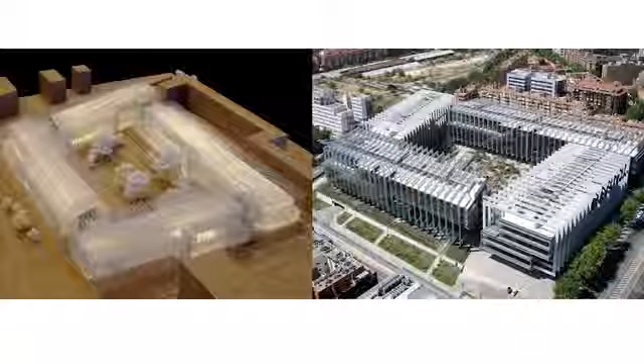Here the challenge was to follow the layout of the city, to follow the block pattern of existing Madrid, in a way to recover an idea that previously didn't exist - because the area around the railway station had been demolished, almost all the old warehouses and industrial buildings around it, and the city joined this area at this particular moment. So the challenge was, following the tracks of the railway, to follow the discipline of the city, using the block as typology, keeping the same height as the surroundings, and creating a central courtyard around which we arranged the new buildings.

The building followed the idea that if it was to be under the discipline of the city, the building had to be the same. So what we did was rise up the block.

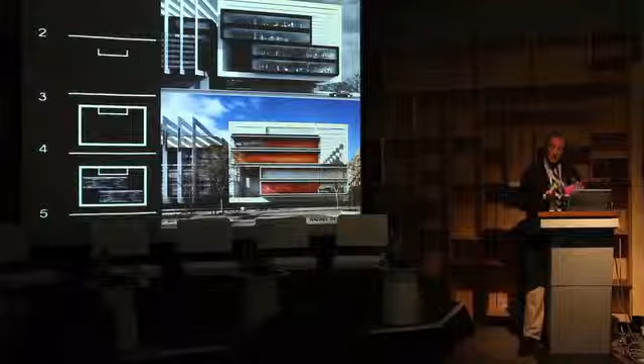We rise up the boundaries of the land to put it up at the square. First is the land, second is just two columns, third is a beam, and the fourth is the land hung on this big beam, and in this frame we switch on the building, the offices.

So the building follows the site. The building is a repetition of this cross section all the time, many times on one side and many times on the other, and the third and the fourth. That's all, very simple.

Those frames are the structure, and at the same time they serve as sun devices and protection, which allowed us to offer the client a totally freestanding floor plan with no columns, because all the structure is outside and protects the building from the Madrid sun, which is quite strong.

We worked on this central space with Tilman Latz, a German landscape architect, in a very interesting collaboration preserving the nature and landscape of Madrid, with pines and all these local green plants and trees.

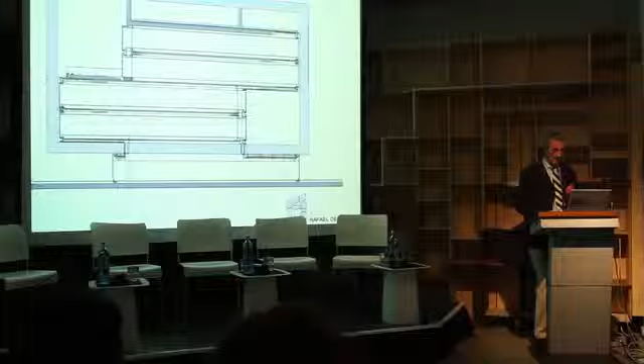The four buildings are connected by very transparent and light bridges that you can see in the plan, and all the vertical cores are outside of the plan to keep this completely free. Once again, the section is, I think, the more relevant part of this project, with this idea of following the track, following the city, raising up the square, and switching on the offices.

The second one is not far away from Repsol. Repsol headquarters is in this picture on the left side of the railway station tracks, and the La-Hoz and Velarde Cultural Center is on the right side.

It's different because we were lucky enough to preserve one of those warehouses or industrial buildings that exist along the tracks of the railway. It was in a very poor situation, damaged, with all carpentry and glass disappeared. The roof and all the cladding of that industrial shaped roof had been destroyed - here's some pictures of the interior.

So the urban planning office of Madrid, the city hall, asked us what use could be suited for this building, to renovate it for what purpose.

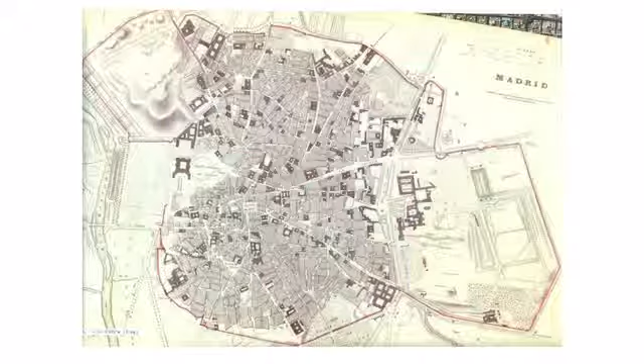Not existing at all today, the Palacio del Buen Retiro. In a way, it was the weekend palace. So the kings moved from the palace itself to the weekends with the park behind the palace, and Madrid in between. The old city and the walls. This is Madrid. The rest is extension and extensions.

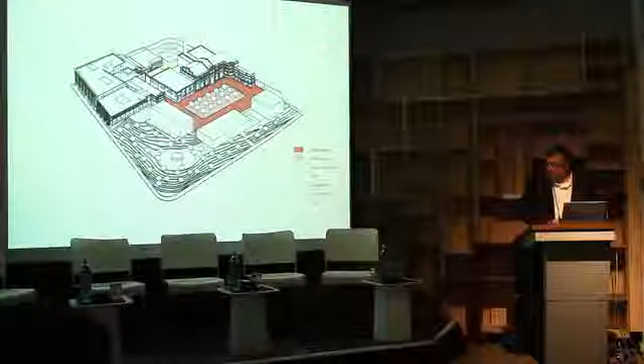This is one of our latest projects, which we just started to think about. It's quite funny, it's an old brewery, like this one here, which we are working on - the Bötzow Brewery. We started on that project a few months ago, and it's not finished, even the planning is not finished. So we are in the process of looking at the fragments we find, collecting them and looking carefully at them, trying to understand the bigger idea of the project itself and clearly the approach to the city.

The Bötzow Brewery had a quite interesting concept because they produced beer but sold it on site. So originally there was a very big beer garden, which allowed the city to enter the project. We are very happy that the client is interested in doing the same again. So talking about urban space concepts, even how a project is connected to the city can be part of an urban space idea, and I think it's very nice that we can bring back this idea to the city again.

But back to the vase - this could be a solution, but we're still looking at it, and we're trying to explore what is the right answer to this, and how the vase looks in that particular part of the city. Thank you very much.

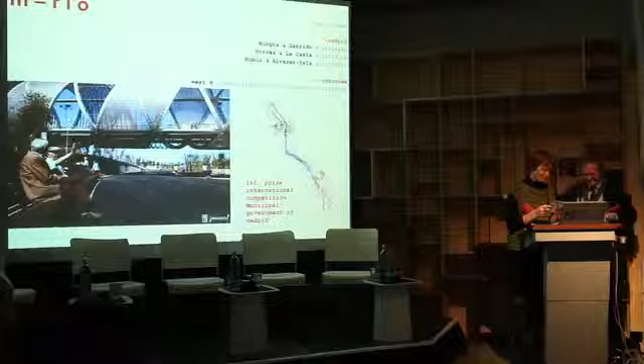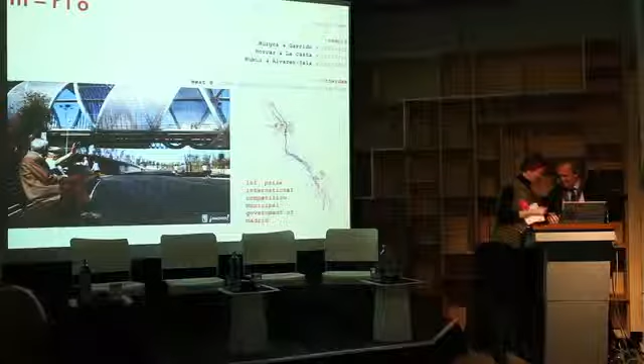Well, thank you very much. It's a pleasure for me to be here. My lecture is going to be about the transformation of the river, of Madrid.

If one speaks about free spaces, gardens, parks, trees in Berlin, it is probably not a very exciting lecture. But if you see it from our point of view, then it is completely different—it's another story. First, I wanted to show some pictures of Berlin and some pictures of Madrid, so that you can have an idea what Madrid is.

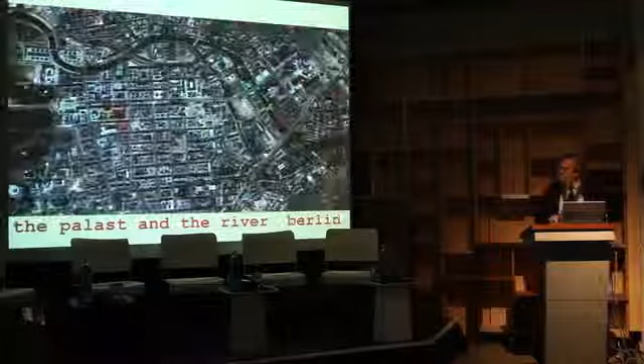The density of both cities is completely different. I've taken pictures of the same scale and from the same zones of the city. You can see here the palace from Madrid and the river from Madrid—this is the river, the Manzanares, and this is the palace. This is the same scale from Berlin. As you can see, even the color is completely different.

In Berlin, the problem is to build things in these voids—they are all over the city. In Madrid, it is completely different. You have a very dense city with many buildings, an old city with much sun. You can find trees only in the streets because there's no place for anything more. So there's a necessity to make some free spaces and put planting trees everywhere. This is the 19th century city from Madrid, the upper side, and you can see Mitte here, unten.

If we speak about the river in Berlin, it's a big one with even ships inside. If you speak about the river from Madrid, as it was before this transformation, it was really a highway. In summer, the river almost doesn't have water at all. It was really a highway, and the big green spaces that are in Madrid were all isolated by this highway—it was almost impossible to go inside.

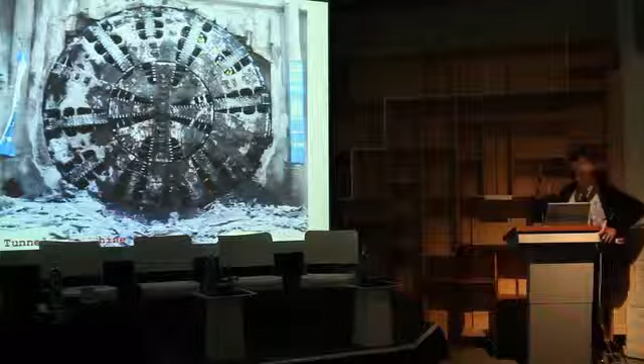One first transformation of this river was purifying the water, and this was made in 1984. But in the first years of this century, the idea of the city hall was much more ambitious. They wanted to bury the traffic and gain upper space to make something, though they didn't know at that moment what they could build there. For 4 years they worked underground, making the tunnels so they could put the highway below and gain a void to make a park or something like this.

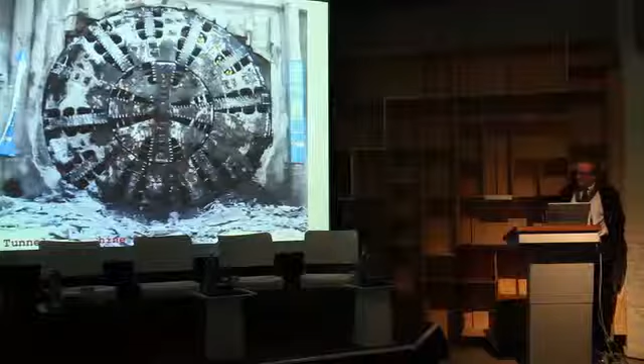It was made into an international competition, to decide what we could make with the city. It was in some way open-heart surgery that was made there. It was very hard, but after 4 years we had 7 kilometers of underground traffic and a big void where we could make something special. Sometimes it is more important to think about what we've done before, because we can make something very nice on the upper side, but the most important things were made before. The works to bury the highway were terrible, and the investment was also very big.

To have an idea of the dimension of this project, it's like taking from Alexanderplatz to the Kurfürstendamm here—also 7 kilometers. Well, and then the problem was: what should be made with this country?

What was our idea with the project? We started to think of the river from a geographic point of view, not just as an accident in the city. We thought more that the city was an accident in the river. So the transformation should be not only about what we can make in the city, but more about what we can make with the river—understanding it as a river that comes from the snow on the upper side until a much warmer landscape.

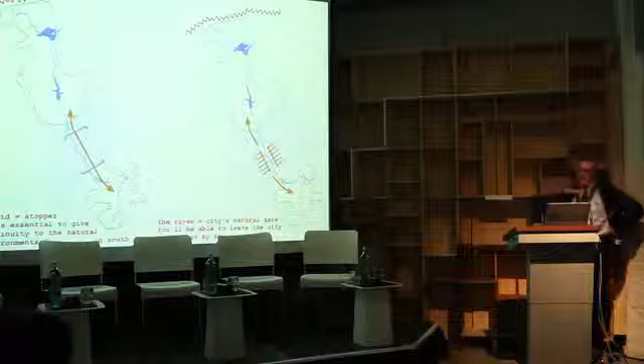So between these two landscapes, we should put inside the city of Madrid as much landscape as possible. And this was the idea of the project. We wanted to give the possibility to go to nature through the river, and to make the river a gate to nature from Madrid. For many years the river had gone through Madrid almost hidden, without the possibility to go from one part of the city to another—it was as if no one knew where to put a highway or where to put the river.

So this idea was to sue the big green areas in the city. Perhaps you have the feeling that in Madrid we don't have green areas, but we have very big ones. The only problem was they were all isolated, and this new operation of the river gave the possibility to connect all of them.

Casa de Campo is the hunting property of the royal family. On the north, Monte del Pardo, and on the south, La Vega, the river, Manzanares. This is the Monte del Pardo, you can see here the Mediterranean wood. This is Casa de Campo, a very big one in the city, in the center of the city, but very isolated. And this is the south of Madrid.

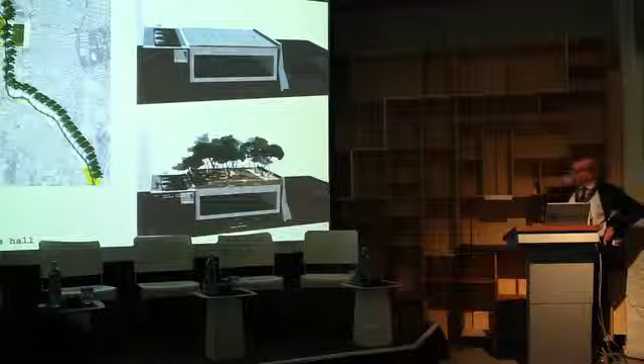So you can put wood all in front of the houses, and we selected this kind of trees, which were more sculptural, more expressive. And big ones, naturally, because we don't have much time. We wanted to have this wood as soon as possible, so that we could hide the buildings.

And this is the aspect now of the river, with many spaces for kids. I must say there are more than 200,000 people on each Sunday on this place. Well, we are going to make now a quick trip through all the river as it is now.

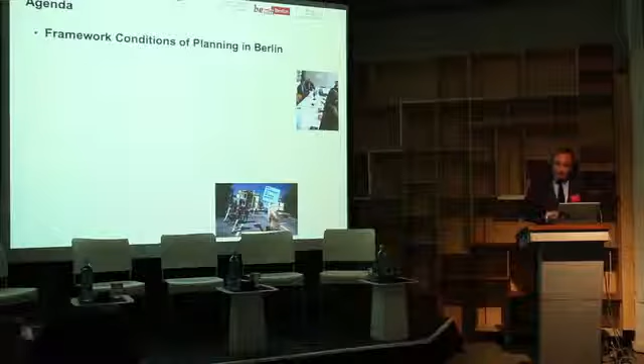So, a green hell, Berlin, as we heard it, completely different from Madrid. And what I'm going to talk about is the framework conditions of planning in Berlin, and what is important to transform the city, what role does heritage and the existing city play for the development of the city.

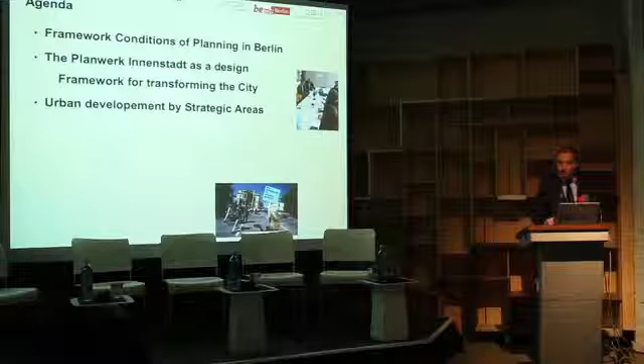Second thing is the so-called Planwerk Innenstadt, which was something like an urban design framework for years in Berlin. Then the urban development strategy working with strategic areas, as we heard it just from Madrid, this green development concept with about 4 billion euros invested. And then the priority of Baukultur, the foundation of Baukultur, which I now work in, leading to a city development concept 2030 in Berlin, and something like a conclusion.

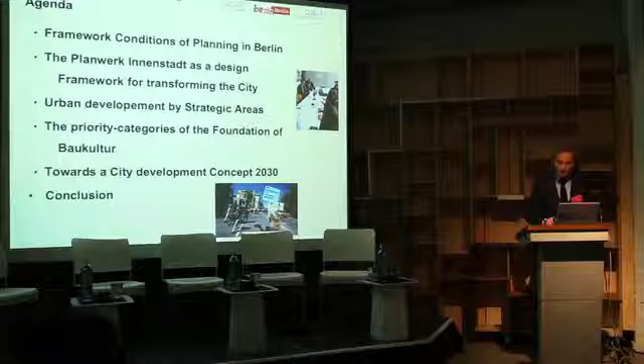To focus on Berlin: Berlin lies in the middle of Europe, like Madrid lies in the middle of Europe. But the importance of this geostrategic situation becomes more and more important because we are, to be honest, still at the edge of old West Europe, at the edge of East Europe, and we are combining North and South. That is important for developing the city.

That's something like the framework, the identity we work on. For years, we've worked on a geostrategic suggestion that perhaps Berlin, combining North and South, can be as successful as the West European countries have been with the Blue Banana.

To focus on Berlin: Berlin is situated in the northeast of Germany, and it's a bit of a monocentral place in the city and in the country, like Madrid is. So each importance, each central offer, is concentrated in the city of Berlin, organizing with axes into the surrounding area of Brandenburg and the neighborhoods.

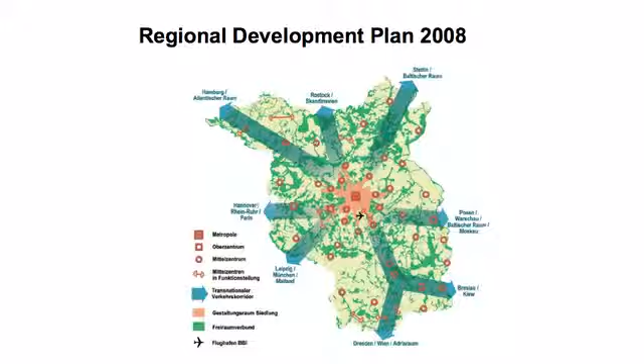We are reachable to only 6 million inhabitants in the region of Berlin and Brandenburg. So this star concept on the axes of infrastructure, streets, settlement areas, railways, is important to understand the city.

The city itself has about 3.5 million inhabitants. We have about 900 square kilometers in size, 40 by 40 kilometers, and we have a two-folded system: a city development department, and 12 boroughs which are in charge of building permissions, legal planning law, and also the first step of heritage concepts in the city.

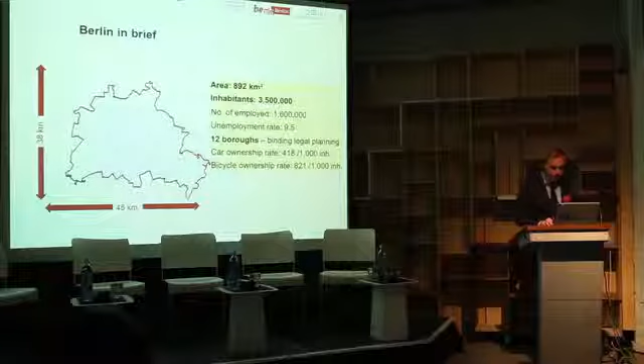Berlin is a growing city, like probably Madrid is growing. We have high fluctuation in the city — a big number of new inhabitants come to Berlin, another big number leave. So the 'real Berliner' has become very rare.

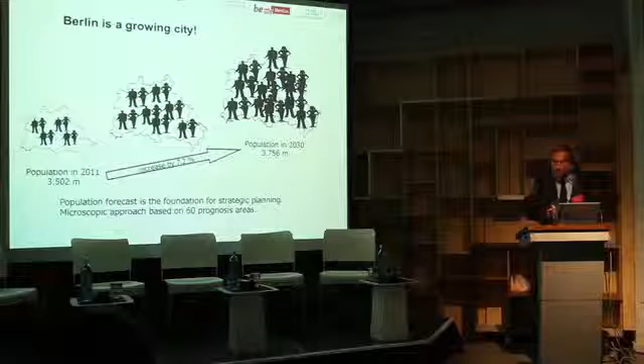We are a city of high fluctuation, and we are a growing city, from about 3.5 million inhabitants up to 3.8 million inhabitants by 2030. That means we have a need for space — residential, office, and so on — in the future.

Although we have a lot of voids, a lot of empty places in the city, we are looking for opportunities. That is very dramatic in the issue of residential space — looking for places for residential use is important because the quality combined with this is often demanded.

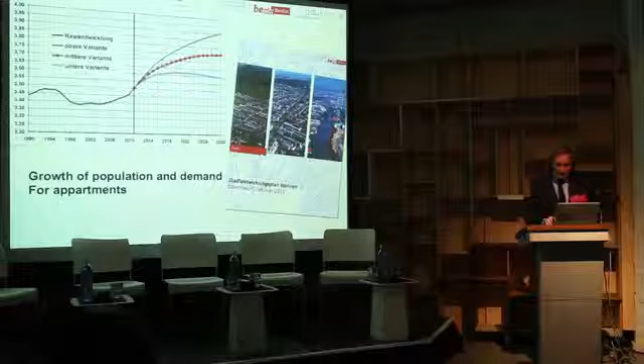On the other hand, Germany, and I think also Spain and other European countries, are shrinking up to 2100. That means the landscape has become more and more empty, and we have to look for strategies to combine these shrinking and growing regions in a real strategy.

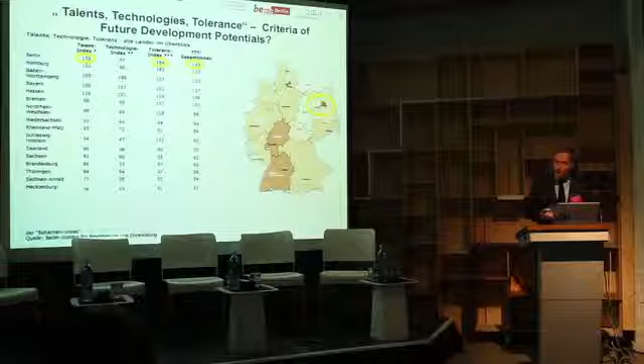To say it in one word, Berlin is something like a city of science, knowledge, and wisdom — not a merchant city, not a bank city, not a trade city. So we have to do something with these competences, being a city with a lot of fluctuation, a tolerant city, also a city with knowledge in it, but doing little out of it.

Looking for real jobs is still one of the biggest challenges in Berlin, because Berlin, unlike Madrid, is poorer as a city than its nation. That's completely different from other cities — all the big cities have a bigger gross domestic product than the country. It's different in Berlin.

That's one of the reasons you have to keep in mind, because development comes out of this structural change from an industrial city — with all the emptied industrial areas we heard about, like Bötzow-Brauerei — to a service city, to a city of new creative jobs. To start with the spatial conditions: with reunification about 23 years ago came the big challenge of bringing both planning systems together.

The West Berlin planning system, the land use plan, and the East Berlin system had to come together. You can see quite easily that the West Berlin part is a grid of development, while the East Berlin part is still a concept that runs with radial streets towards the old castle, towards the Alexander Tower. That is very important to understand the city.

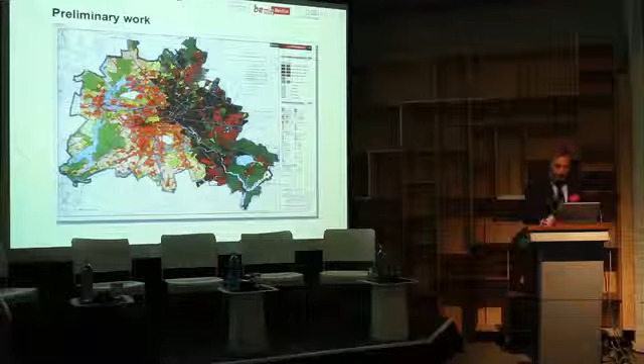The preliminary work was done by looking at the fabric of the city, which has high density. It's included within the S-Bahn ring — what we call the S-Bahn ring — and along the axes of settlement areas.

After years, we were able to create a new land use plan for the city, including a polycentric system with two main centers, east and west, and 12 borough centers surrounding them.

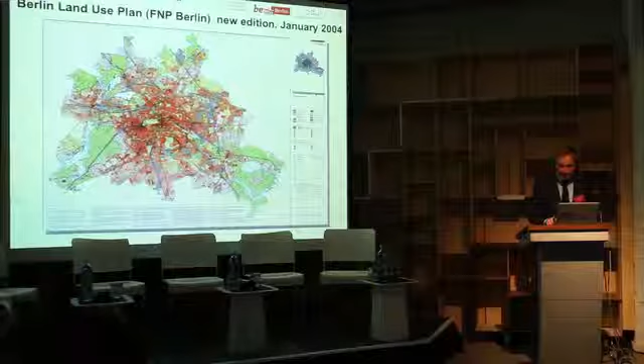So from the beginning, we wanted to hide away the suburbanism concepts that were done in other big cities, which were hidden away in Berlin because of its isolation. We announced going back to the inner city to develop the things already given there.

The strategic element, something like an urban design framework, was the so-called Planwerk Innenstadt. We heard it from Harald Müller - a design concept that says we want to fulfill, repair, and reconstruct our old European city, because the infrastructure - the streets, canals, piles, subway stations - everything is still there. Restoring this and bringing back the old density to the city was one of the biggest issues.

The reason for that is the city had a high density before World War II - we could perhaps compare Berlin even with the density of Madrid - but it was demolished in World War II, more than 50% in the inner city.

Then between 1953 and 1989, the city was not demolished again, but transformed by us, by planners, looking after new opportunities for new concepts of settlement areas, new traffic or infrastructure access, and so the density again was decreasing.

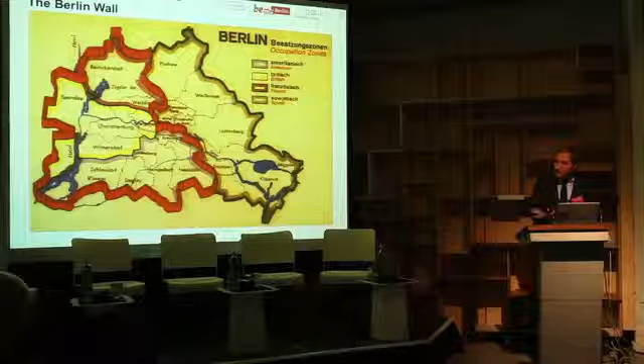In that time, some new things were under construction, like the socialist modernism of Hansaviertel, the same thing in West and East Berlin. The whole time, this special aspect of being inside borders in West Berlin, but also inside borders in East Berlin - a political border - is very important, because this ribbon, this wall inside the inner city, was not only a wall, it was a system of space: a front wall, a back wall, the space in between - that was something like a structural element.

Today our power and our strategies go in the direction of saving or bringing back this structure as a monument, as a heritage project, but also as an element of open space development in the inner city.

Then, step by step, the city was fulfilled with new buildings in Berlin. You see the East Berlin part, Friedrichstadt, was fulfilled in the strategy of the European city, even from the GDR.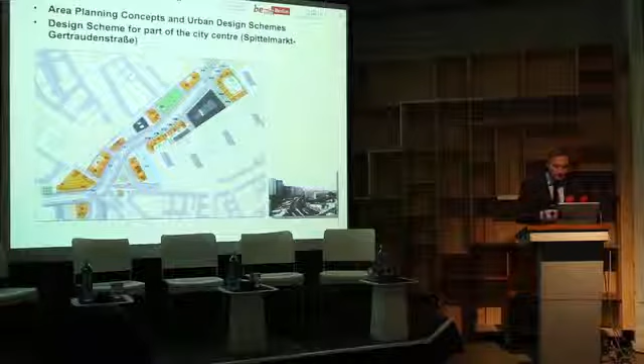Step by step, those opportunities of fulfilling the inner city, of regaining the fabric, were done in very complicated manners, because you have to pre-invest in the infrastructure, find a solution, then develop areas like this, and then you can sell the ground and try to make something out of it.

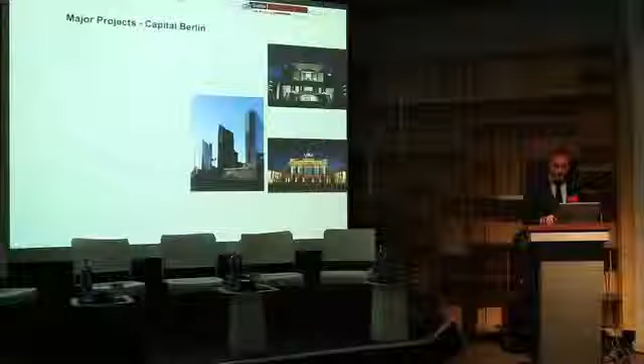This process is still running. For example, Molkenmarkt, just in the city center, is being transformed or could be transformed into an inner city situation, but it costs a lot of energy, a lot of money, and so this project will run for the next 20 years.

The last step, if you want to put it like this, the closing stone for everything is probably the castle, which is under construction. You see the competition for the castle, more than 1,000 works submitted, but the result is the castle as a castle - these are images from the new building, which will be constructed as a Humboldt Forum just in the middle of Berlin.

So what we gained with this Planwerk Innenstadt is not only a restored old city that was announced as a critical reconstruction - and the result we probably get is a reconstruction, not as critical, not as creative as we hoped - but we got a lot of open spaces, as a colleague from Spain announced, promenades, walk sides at the river, and a lot of urban design ensembles. Not the single building was important, not an icon building like Guggenheim, but an urban design ensemble like Pariser Platz, Potsdamer Platz, Friedrichstraße, and so on.

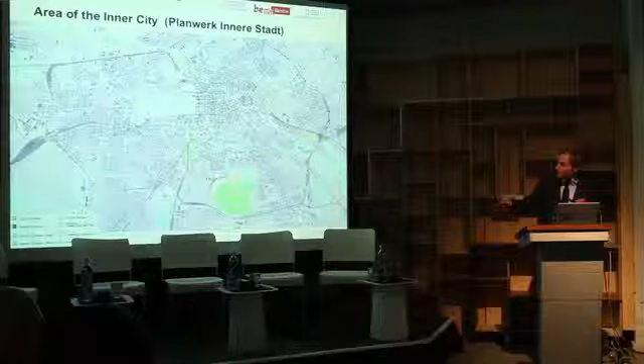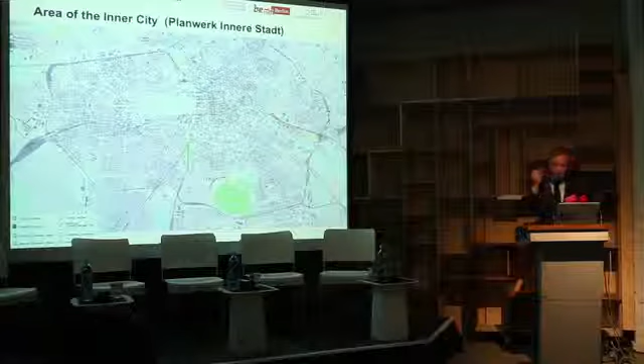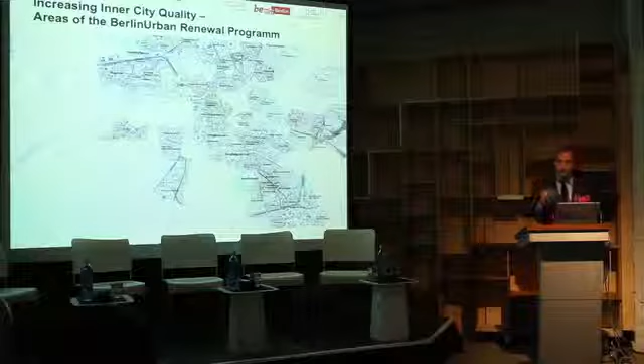Inside this fabric of the Planwerk Innenstadt, we have this legal corridor of investing in the existing situation, the urban renewal program by law, by tax, and so on, which were given to the city to restore the existing situation a bit like it was.

Berlin, as you know, is a UNESCO World Heritage City, and we do have projects now with the settlement areas of the 20s. Professor Haspel probably will announce this. Berlin got an international place by being

a capital, with more than 144 embassies, like Spain, for sure. And out of this internationality, a lot of tourists come to Berlin. Berlin, for years, has been in place 3 in the world, after London and Paris.

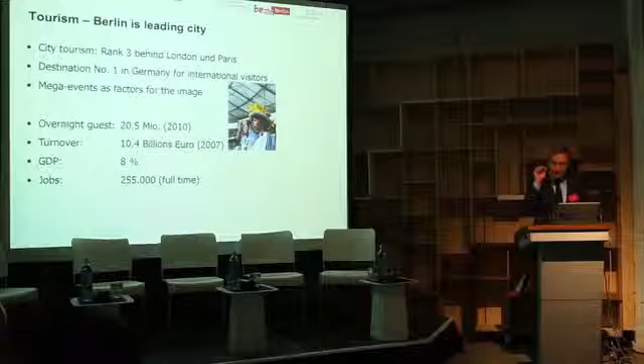And out of this touristicization, some problems also come for the heritage buildings. The Neues Museum, for example, at Museum Island, is under the influence of about 3.5 million tourists a year. The Louvre in Paris has about 12 million tourists a year, and Berlin has an opportunity of giving

offers for 100 million tourists or guests a year. So if all those guests want to go to Museum Island, then we probably very quickly have big problems. So our strategy as planners is also to stretch this touristification process for the whole city and find other opportunities

to guide away those big influences from the old traditional islands. The strategic areas concept was lost, so I go to the east-west corridor, the axes. That is a measure where we try to work on an urban design level for new strategies for the city.

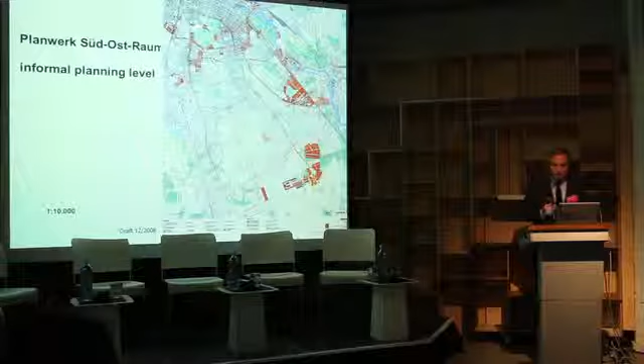The southeast corridor, which runs from the city to the new airport, offers a new opportunity to this corridor—for example, Schöneweide, which has been an industrial complex with old buildings included.

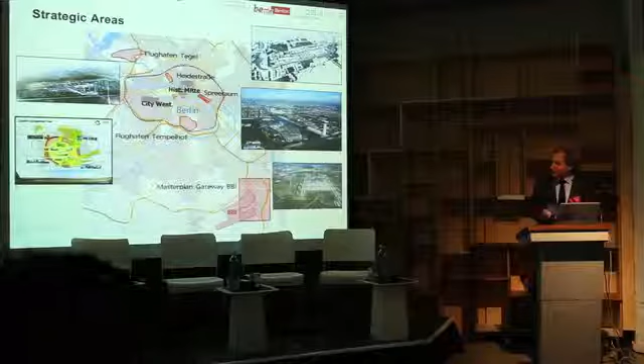Out of this strategy, we first worked with the Planwerk Innenstadt, then worked with the whole inner city. Now we try to concentrate our strengths on strategic areas. That is done because our money and also our power are not able to do everything at each time.

So the strategic projects were coming out of infrastructure, whereas things under development are, for example, transformation of airport land or of water bodies. Let me quickly run through these strategic areas.

These are places like, for example, the surrounding area of the main station, the new main station, which is a railway cross in Berlin. It combines not only the city on a central place where more than 300,000 passengers a day pass through, but it's also a central place in Germany and in Europe for the railway.

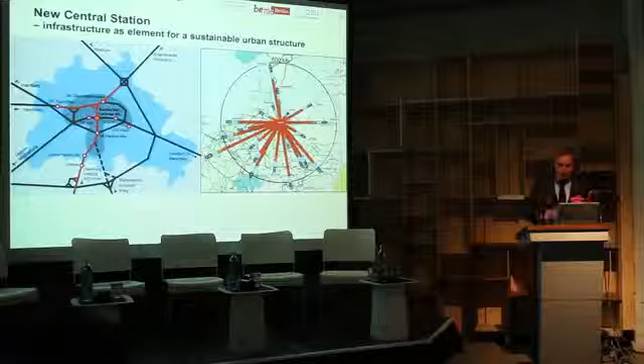And to the north of this area, we have an existing 40-hectare plot of land. There are protected buildings included. And this 40 hectares can be transformed.

We did a master plan for this, a master plan which shows quarters orientated around the existing buildings, all of which are included in the process. They act as something like an impulse for the atmosphere of these quarters.

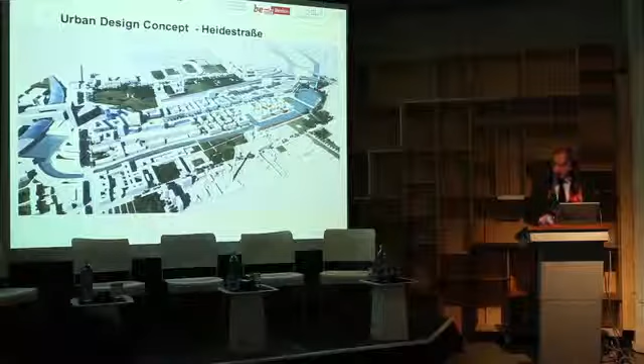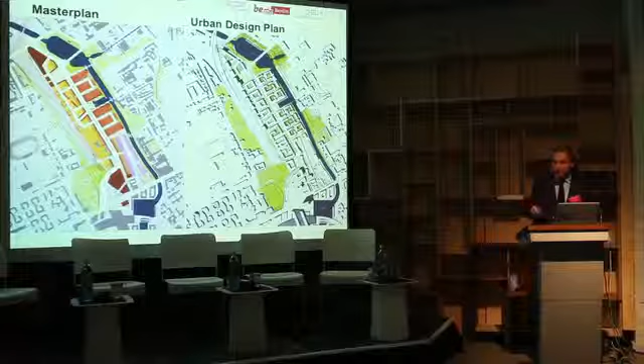And the concepts are done like this: the urban design concept is transformed into a strategic master plan, which is able to be developed with high flexibility in the process.

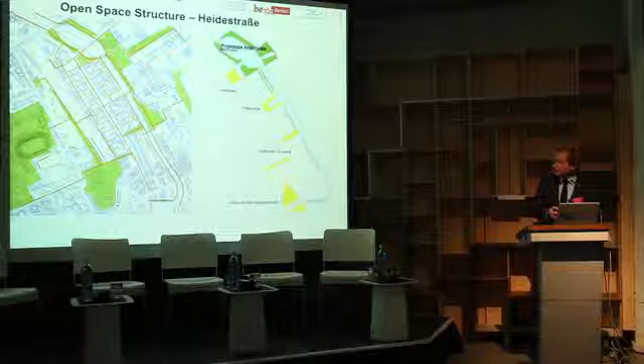However, the open space, the network of ways, the connectivity, and the cohesion of the spatial conditions are the motor of development, and therefore we every time do some open space competition to make the open space something like a framework for the single buildings which are included.

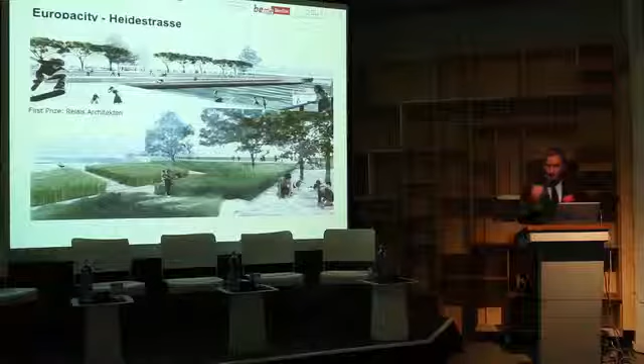And green space in a city, as in Madrid, is more and more important for the city. At the end it will look like this.

Or the Spree area, the water body of Berlin, which has a high dimension in the east sector. There's no master plan given there.

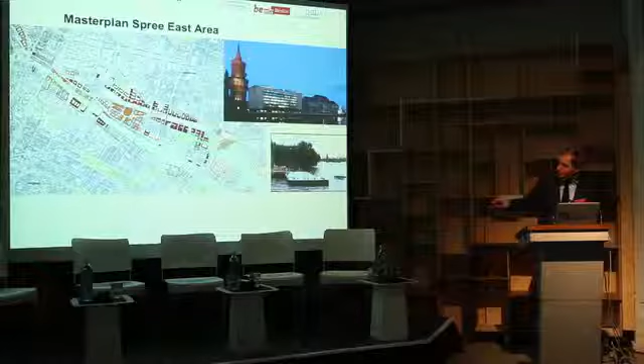It's only part by part development done by investors or done by the districts. Nothing really works together as a master plan.

And the strategy was to implement intermediate functions as pioneers for a new frequency of usages in this former borderland—that is the East Side Gallery.

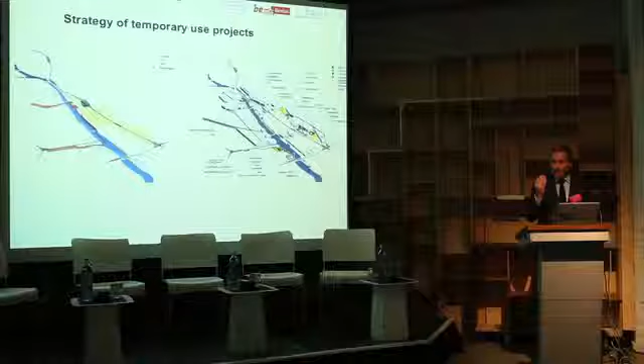What was done out of a protest of people—because this project wasn't really well communicated, it was communicated as a media city project—was to make a thing that investors often do. They announce their new world with transparency volumes, and those transparency volumes can later be made dark.

So if you paint a transparency volume dark red and so on, that's a big danger, and that danger led to protests. The inhabitants in this region were against the development of new dense buildings at the water; they wanted more quality at the water with promenades, a lower density, and so on.

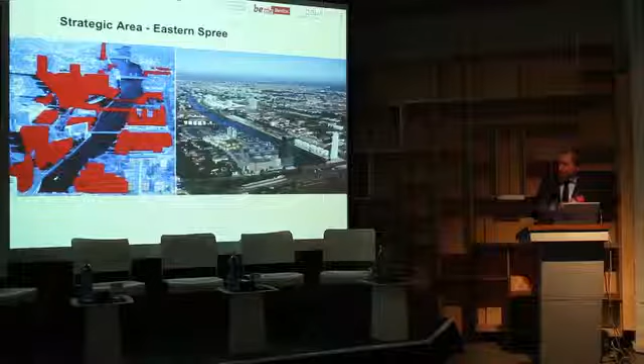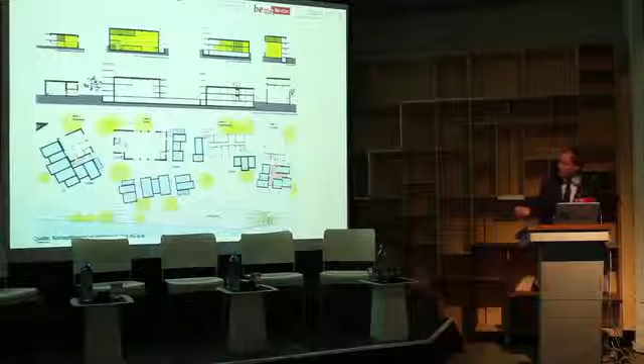Things changed, and what is done now is new development done by professionals together with inhabitants, which is very important, together with users who are able to perhaps only afford 25 square meters and use something good to be implemented in the projects. This concept for the place at the water body is something like a village which offers connectivity and open views to the water, with halls and small houses at the halls, and will look very strange compared with the old Berlin buildings, a new dimension.

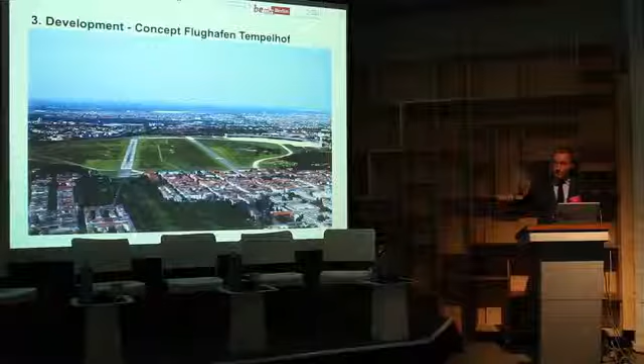We will see how architectural discussion will come under the influence of these new and modern projects. As for our old airports, once the new airport opens in the southeast, we have to close Tegel, and we already closed Tempelhof. What is very important with Tempelhof is this big building, which is the third biggest building in the world after the Pentagon and after the Ceausescu Palace.

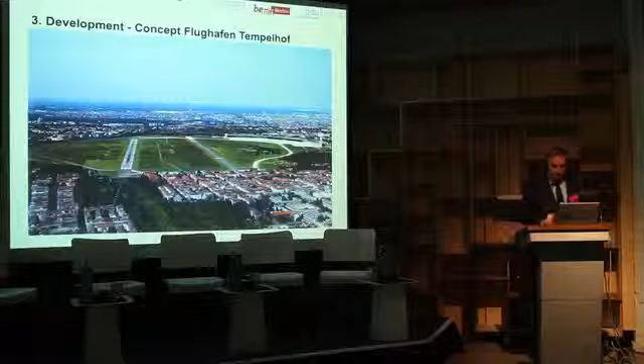It has about 300,000 square meters, 1.2 kilometers in length, and it's very big. The question is how to transform this area. The idea was to make a big park out of it.

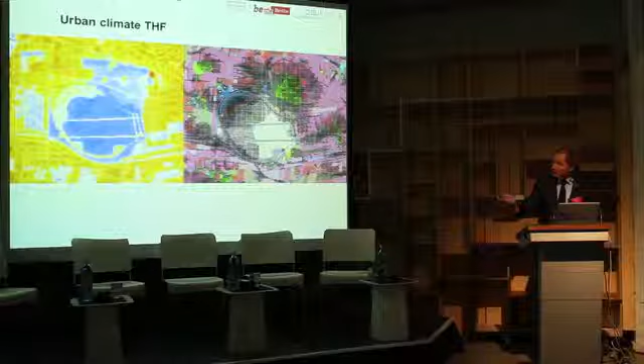The reason for this big park is the climate situation, cooling down neighborhoods by cold air at night, ventilation, and by opening it, the people in the surrounding area very much like this open space as an offer, as an opportunity of having nature, having a landscape part inside the inner city. It has become something like an image for Berlin.

So it's Berlin style, and the strategy for developing this area through intermediate function is very much focused on this Berlin style. On the other hand, it's important to find solutions for this big existing building, which is under development and has to stay as it is, while looking for new creative functions, which is very, very difficult.

A public-owned company is in charge of developing it. Not only the building is important, but also the open space, which we're running through a competition done by Grossmax, landscape architects, and the development of neighborhood areas in the surrounding, offering residential space, which is very important, and a new library. Or Tegel Airport, which is still open and will be closed in the next 2 years, hopefully.

There another big transformational area is given, and also the idea of what to do with the existing terminal buildings, only 40 years old, but something important for the future. Our strategy was to develop this area step by step with public participation. The first step was to bring a vision idea for the whole thing.

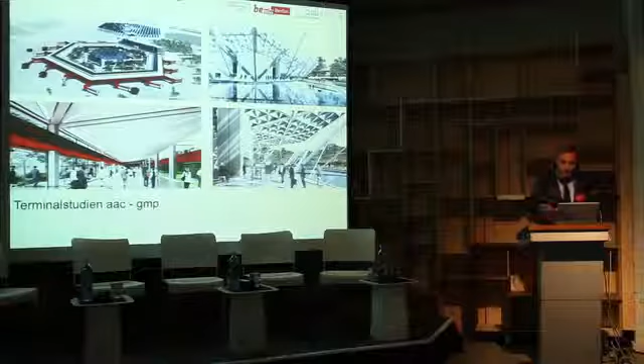This process was announced to the public, and brought the result of a working area and a technology city, a science city. By GMP, the architects of the terminal, the answer was given for what is able to be transformed in this existing terminal. They announced something like a lecture space and a university which we can implement in this area.

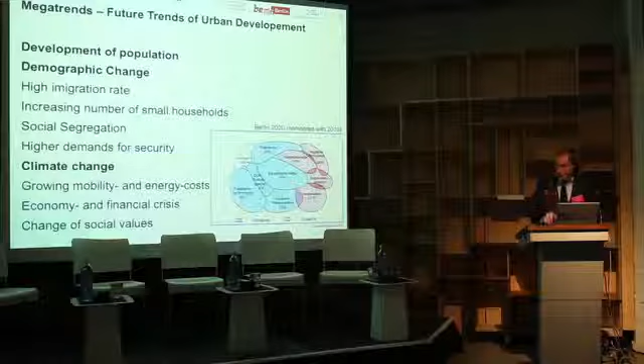So working with the existing building is very important, also as an impulse for developing the whole Tegel Airport as a technology center for university and new production, industrial production, thinking about work in the city. If we focus on the foundation of Baukultur, we look after our challenges, the mega trends of development, the development of population, the demographic change, the climate change in our city, the change of social values.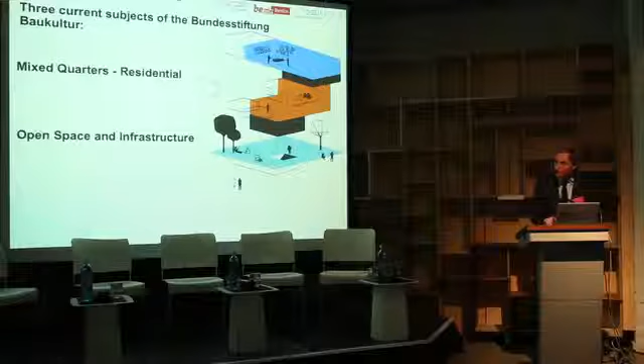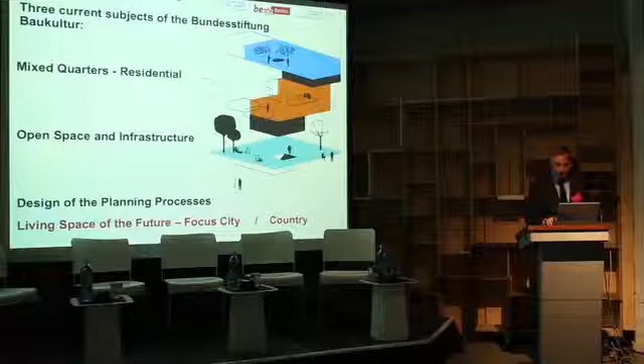Therefore we announced 3 topics. The first is mixed quarters, residential is important. Second is open space, which becomes more and more important in cities, and the infrastructure. Third is the design of planning processes, and we announce everything together with living space of the future, focusing on city and country. That is important as a framework for everything we do, also with heritage, restoring existing situations, and implementing new buildings in historical neighborhoods.

So, open space and the infrastructure. In the next years, a lot of money will be spent in Germany on infrastructure, streets, mobility, open parks and gardens. There we as planners can profit with our strategies, for example rainwater management in cities, which gives a new opportunity of coming to the water, and perhaps in every city swimming in the water.

The way of new promenades, the way of bringing open space into the neighborhood of historical ensembles, is so important because we have so much space. Even in Madrid, I don't know the numbers, but 44% of the area in Berlin is green - parks, gardens, and so on - and that is owned by the city.

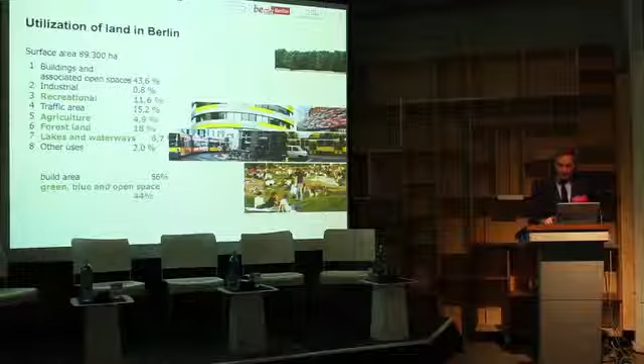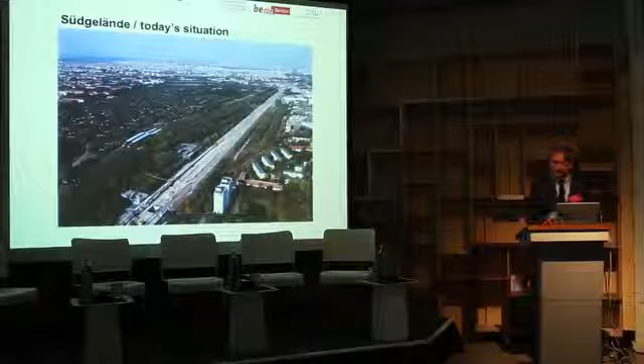44% is our own land, and if you are owner of the land, you can do something out of it. For example, parts of the Mauerstreifen, the wall strip, is owned by the government and the city. So if you have little money and want to do something out of it, it's something like a Pareto principle of development - you focus on open space strategies, not like Chicago or New York did with cultural projects rather than landscape projects. But if you have little money, let it grow like this, from a railway land, implement a little planning, and by also looking after the old function, you can offer open space.

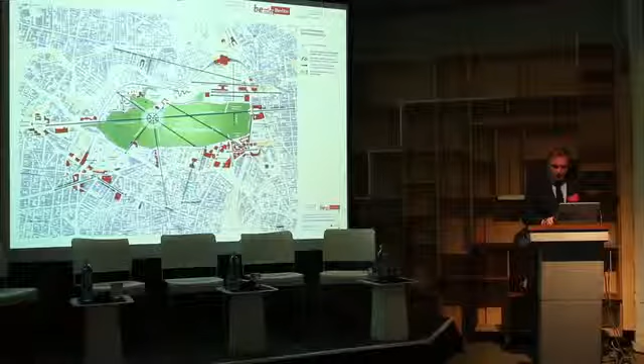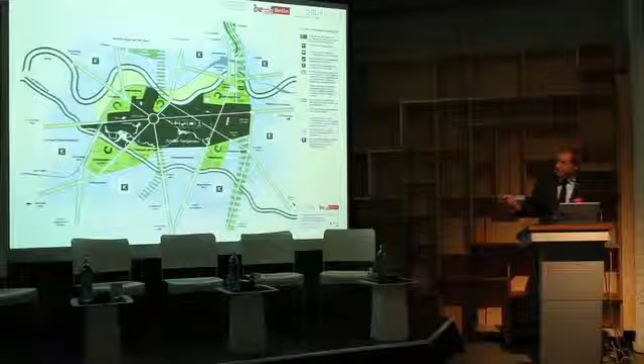So rethinking your city, seeing it differently - not only with the green, but perhaps with the heritage building, perhaps with the existing situation - is so important. Take the last example, the big Tiergarten, our green island in the city: it can become much more important for city development, developing out of this green strategic area, which is also a restoring project. We have a garden heritage program in Berlin. This program says not only save and develop the existing park, but connect it with the neighborhoods and do something out of it for the whole city.

Strategic processes more and more become important, even with open space development, and we focus our green vision in Berlin on three issues: urban nature in the city, the beautiful green city and streets, and the productive landscape - very easily shown with this picture.

People say the older I become, the more I need nature, the green, in the city. Yes, and you can combine something like a strategy.

If you look for a heritage strategy, it's important to have goals. 2017 could be a very narrow goal, 2030 the goal of demographic change, and then the goals of climate change mitigation and adaptation of the city to climate change challenges. The quarters are important because we need big residential development in the next years.

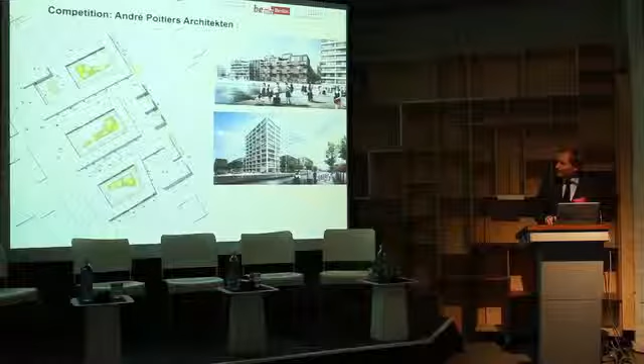And therefore we look after qualities in the quarter. What is important if you implement new houses is the ground floor. The ground floor needs to be open space, a public space, not a closed area for the city.

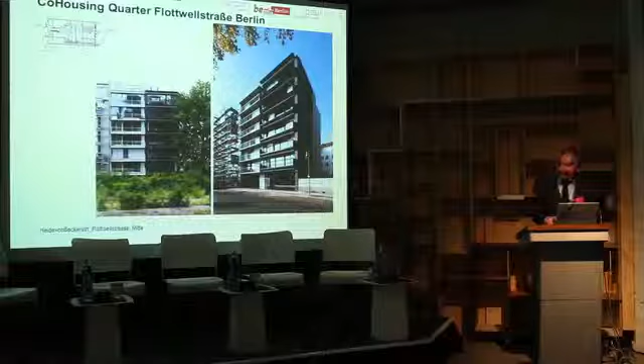In Berlin, as in former years in Madrid, housing has been the biggest challenge - 100,000 new apartments are needed in Berlin, and it's important how they will be organized, how they will look in the future. The creative function of this new housing has to be involved in the process.

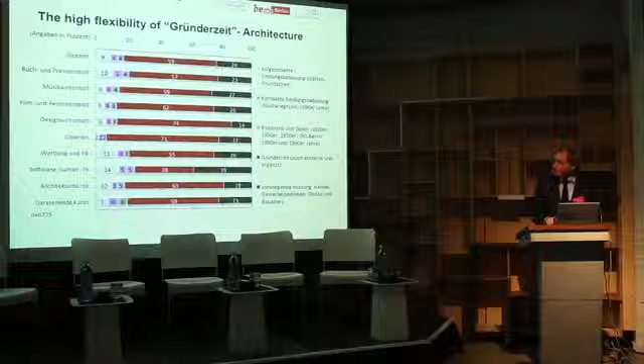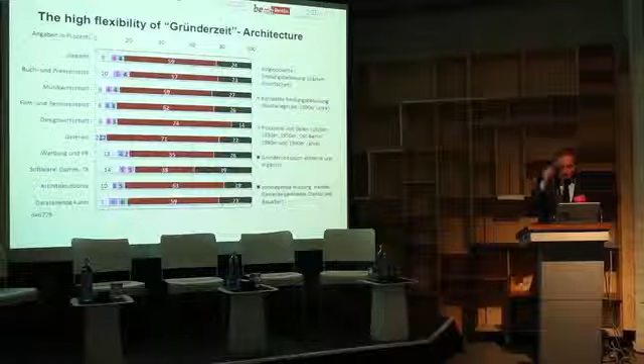What you see there are old fabrics, old housing, and the usages looking back to the Gründerzeitbebauung - existing buildings from that era, because they have high ceilings, flexible ground floors, 20 square meter rooms, and so on. Perhaps we have to look after a new Gründerzeit in our new architecture. That's also the reason to look after the quarters in Tempelhof and Tegel.

Last point: processes are important. Even heritage, even implementing old housing and restoring it, has to be announced to the public. There must be conferences, you have to offer your arguments. Architects have to inform about their strategies, because that is important.

You see our strategies and the way to a new strategic goal, which is the Urban Development Concept 2030 in Berlin - very important, which also involves cultural issues, not only social or economic ones.

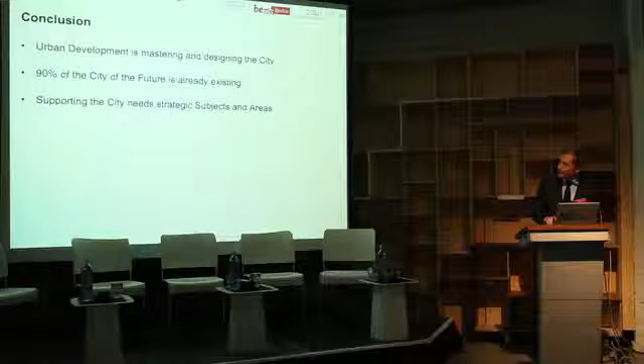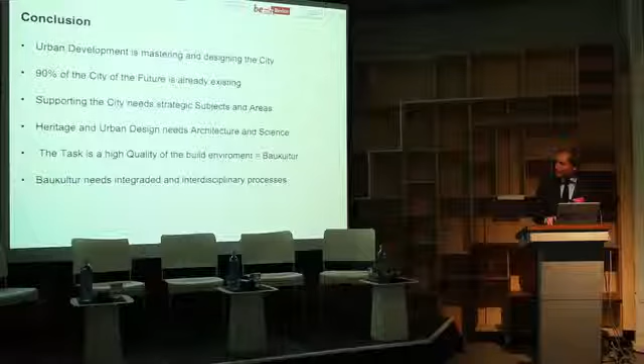To come to the end, I'll focus very quickly: urban development is about mastering and designing the whole city. 90% is already done, and we have to implement our heritage and urban design needs in this process. The task is high quality in everything involved, integrated processes. That means Baukultur, which can't be translated, and therefore we need not only architects, but planners, technicians, politicians, and the people who work in the city.

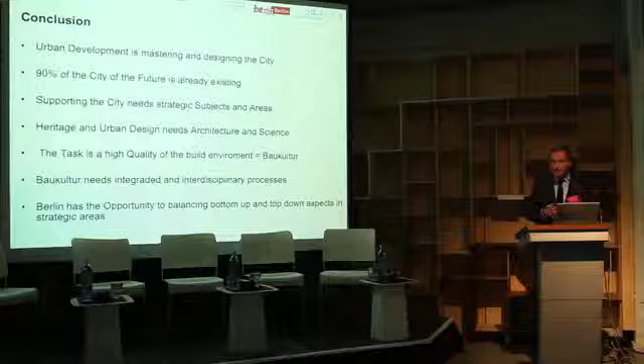Berlin has, in the last years, tried balancing the processes top down and bottom up, and has become successful in and with strategic areas. Thank you for listening.